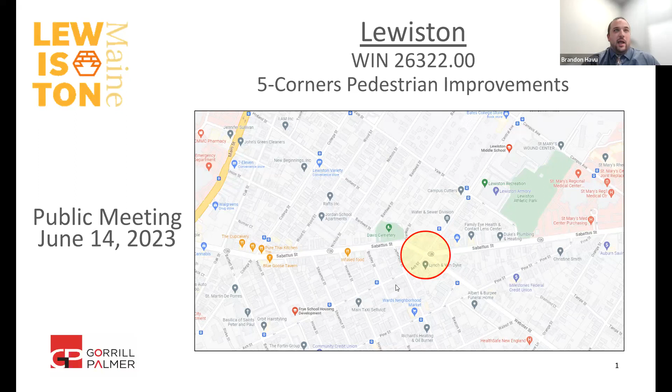As Paul mentioned, my name is Brandon Havu. I'm joined by Don Ettinger. We're from Gorrill Palmer, and we're very pleased to be teamed with the city in providing design services for this project, which is located at the intersection of Sabattus Street with Webster Street, Ash Street, and Central Avenue. The project itself is what's referred to as a locally administered project. So in this case, it's a teaming arrangement between the city of Lewiston and Maine DOT. So essentially there's state and local funds and oversight that go into the project development.

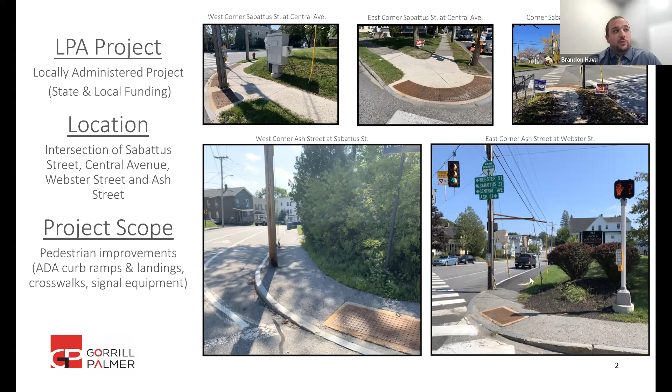So the real focus of the project is these two locations shown on the bottom half of the slide, which are the Ash Street corners. The one on the left is the corner of Ash with the west leg of Sabattus Street. And the picture on the bottom right is the east corner of Ash Street over at Webster Street. Before we dive into specifics, I'll start with some characteristics of the roadways that we use to help assess the design criteria and standards that we aim to achieve with the design.

Sabattus Street carries about 8,000 vehicles a day, and it's a corridor priority 1. Maine DOT ranks the roadways in the state with a priority between 1 and 5. A priority 1 is one of the higher priority roads, a classification used for the interstate highways and primary arterial routes that serve mobility travel between regions. The speed of Sabattus Street is 25 miles an hour in this area. I lumped the three side roads together; they were pretty similar. They have about 3,000 to 4,000 vehicles a day on each leg, their priority is either 3 or 4, and each is 25 miles an hour as well. In this case, the project improvements are predominantly outside of the roadway and limited to the shoulder and sidewalks. So much of the existing roadway standards will match the existing conditions.

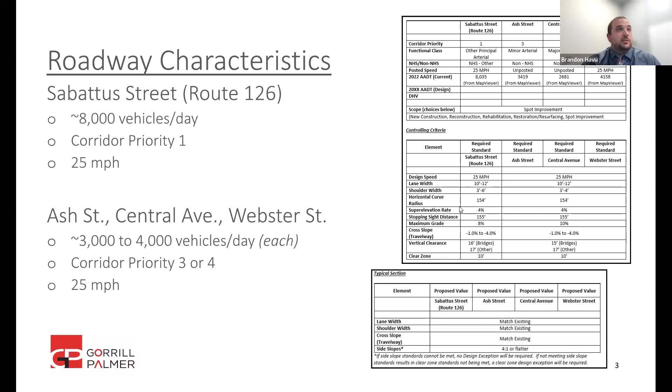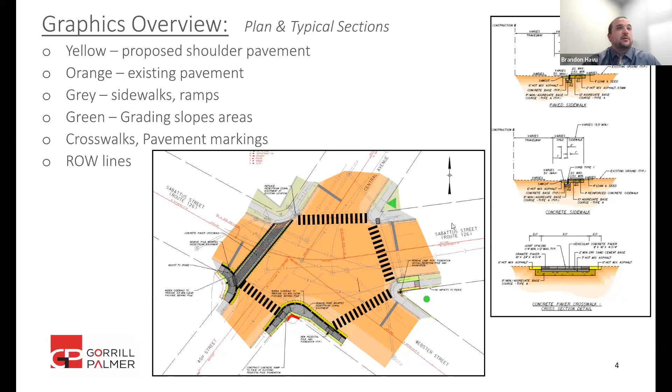Jumping into the improvements to the Ash Street ramps, you'll see that we're reconstructing both this westerly corner and the easterly corner at Webster Street. In the case of the west corner at Sabattus, you'll see the layout will generally replicate the existing conditions, but what we will be doing is helping to improve some of the slopes down into this landing area or turning space. And we'll also be flattening some of the slopes transverse to the road to really target some better ADA access to those corners.

We'll also install a new pedestal pole with a push button and heads right behind the back of the sidewalk to make sure that it's accessible. Right now it's mounted to the existing signal pole. We're going to pull that off and give a dedicated pedestrian pole and heads at that spot. The patterned area you'll see shows that we're going to be reconstructing the ramp in concrete to match those other three ramps on the top side of the intersection.

And outside of those areas, there are short stretches of asphalt sidewalk that will be reconstructed to tie back into the existing conditions. And that lets us transition some of those slopes so that we can get as compliant and accessible an area as possible within the ramps and landings.

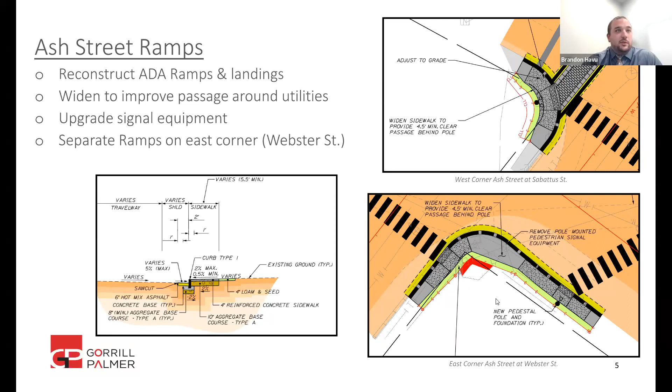Jumping into some of the crosswalk improvements. Most of the legs will be painted with the block style, high visibility white stripes that you guys are accustomed to seeing, and I think is what's currently out there. There's one exception to that, which is the westerly leg of Sabattus Street. What we're looking at at that location is installing a concrete paver crosswalk, which is to help identify this crossing as the preferred crossing route for travel between Central Ave and Ash Street.

What we found when we looked at some of the traffic numbers was there was a pretty high volume of crossings of the easterly leg of Sabattus and over Webster Street to get to Ash Street, or between Ash Street and Central Ave. What we would like to see happen is to have more folks use that westerly crossing so that they can just cross one point at this busier intersection. And if they need to switch sides either on Ash or Central Ave, it's safer and easier to do that away from this intersection where traffic volumes are less.

Over at Webster Street, the primary reason that we're looking at reconstructing a new ramp on the Webster Street leg is to help improve the skew angle of this crossing. As any of you that have used it today will know, this crossing is currently severely skewed, and it creates a condition where if you're walking particularly from Ash Street over towards the Sabattus Street corner, your back is more or less to the oncoming traffic coming from this leg of Sabattus Street.

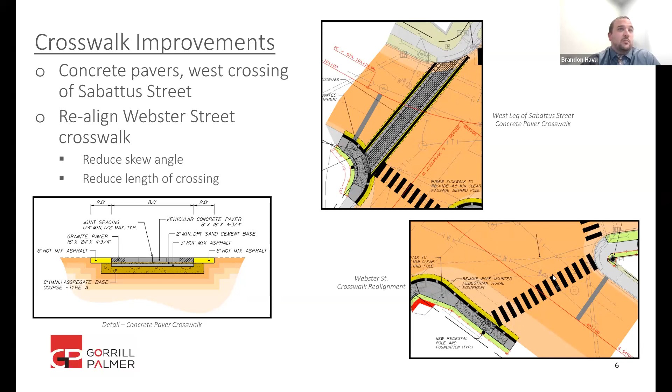Some of the ancillary items related to the design. For coordination, there are overhead and underground utilities located on each of the corners and within the roadway. We don't expect any significant impacts to occur, but there may be some adjustments to the location of guy wires and whatnot that we'll be coordinating as design continues. For environmental, there isn't a significant amount of work associated with this project, but we will be evaluating it and any permitting requirements that may be necessary as we progress with design.

Lastly is right-of-way. I showed the existing right-of-way back on the previous plan graphic. There are some impacts anticipated adjacent to the areas of the ADA ramp and sidewalk reconstruction. So if you're one of the impacted parties, DOT will be leading the right-of-way coordination effort, and they will make contact as we get a little bit further into final design and the grading limits are fully established.

In regards to maintenance of traffic, so how we deal with the traffic flow through the intersection during construction, evaluations are ongoing between the city and DOT, and that will be something that we discuss. There may be some shoulder closures and/or lane closures to shift traffic around the work zones. The city will have police officers out at the intersection anytime work is ongoing to help direct traffic, and there may be both day and night work depending on the nature of what's ongoing.

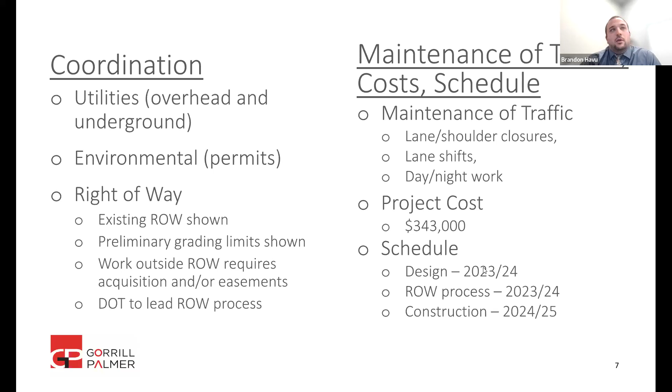And with that, we'll be glad to answer any questions or comments you folks may have. Typically you can either chat in a comment or if you'd prefer, I think Paul may be able to unmute you as well. Kira or Matthew, do you have any comments or questions for us? I just unmuted both of you, just in case you've got any questions or concerns. No, I'm all set. Thank you, though. Okay, no comments either. Thank you. Okay. Well, thank you for coming. If you think of something afterwards, I think my email was in the notice of this meeting. So just give me a shout if something does happen to come up.